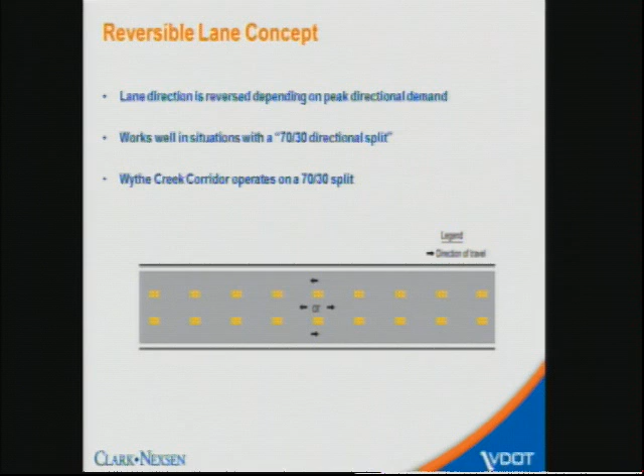It works well. So in this situation, you would dedicate 2 lanes south in the morning, 2 lanes north in the evening, and in the off-peak periods, basically 9 a.m. to 4 p.m., that center lane could operate as an opposing left turn lane as an option. So the project is set up very well for this option based on the way traffic operates along the corridor.

What we'll do first is get into the cost savings. What's occurring with this concept and how do we achieve the cost savings? First off, and we'll focus on Hampton, that's where the majority of the cost increase is and where the majority of the savings are. We have right-of-way savings due to a pending property transfer with NASA. NASA's working very close with VDOT to transfer the property out front of the fence line in order to allow the alignment to shift further to the east.

That's a big benefit. We're, of course, eliminating the raised medians between Commander Shepard and Voyager. You typically see those when you have a 4-lane divided highway. We're now taking away the division, and it's going to be a 3-lane undivided roadway. Reduced right-of-way impacts on the west side of the alignment. We've got some slides that will show you, so you'll be able to really visualize what we're talking about there.

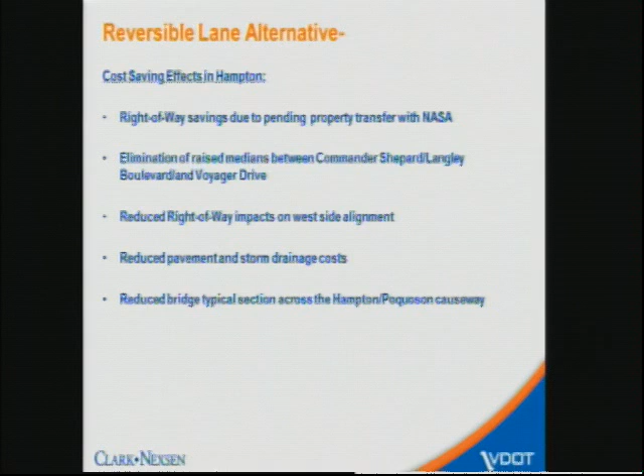And of course, when you're talking about going from 4 lanes down to 3, reduced pavement, drainage, infrastructure, there's a reduction in cost there. And then of course the bridge. The bridge is the most expensive project element, as Mark indicated. You're reducing the width of the bridge. Good savings there. Next slide.

So this is just an overview of the cost savings that we've estimated. About $2.5 million, again, this is in Hampton, $2.5 million in the pavement, earthwork. Bridge savings, 2.6. We have an additive item of $600,000. That's for signalization, and we'll get into that in a minute related to the reversible concept.

So that's a total construction savings of $4.5 million. And when you escalate that to 2018, which is when we're planning to advertise the project for construction, that's a $5 million savings. The right-of-way savings is pretty significant. Just the property, the land itself, $450,000.

The building value's been estimated at 1.5, and then all of the various administrative savings costs, such as relocation assistance, administration, condemnation hearings, those have been estimated at 1.1. So when you roll all this up, grand total savings of $8.4 million in Hampton alone.

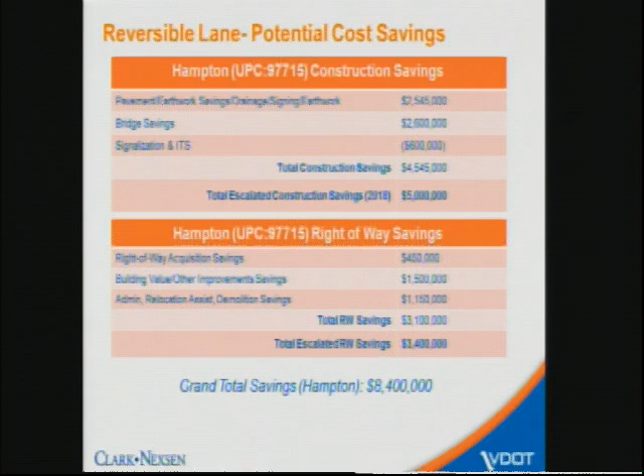Next. Okay. Talking about Poquoson, we're talking about reducing the typical section or the roadway width 5 foot on either side. Again, taking away that 4th lane. And so with the reduced pavement and drainage costs there. Also anticipating savings related to not impacting the HRSD force main to the south end of the project in Poquoson.

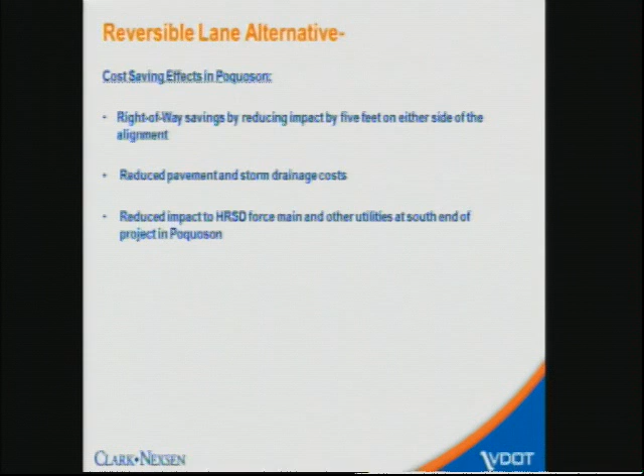Taking these savings into account, we figured about $800,000 in the pavement, earthwork, road construction savings, but then the additive cost for the ITS, Intelligent Transportation Systems components that are related to the reversible, you get a savings of about $100,000. And then with the property, as shown below, we estimated about $400,000.

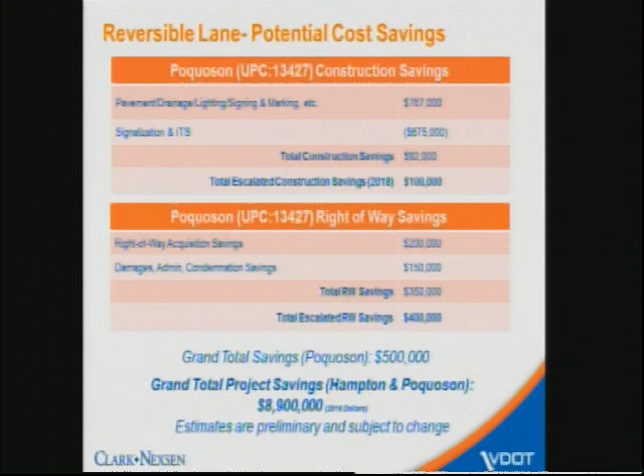So rolling all this up, go ahead and hit the button. We're now at $8.9 million, call it $9 million in savings, realizing that we had that $10.4 million shortfall that we're trying to close. So it gets us very close. Very close. Yep. Thank you. Okay.

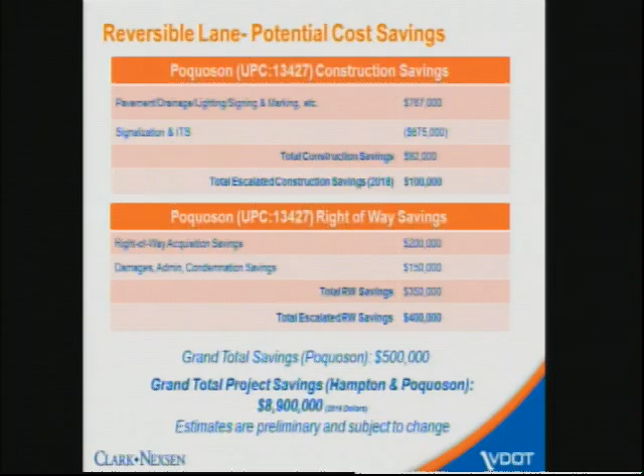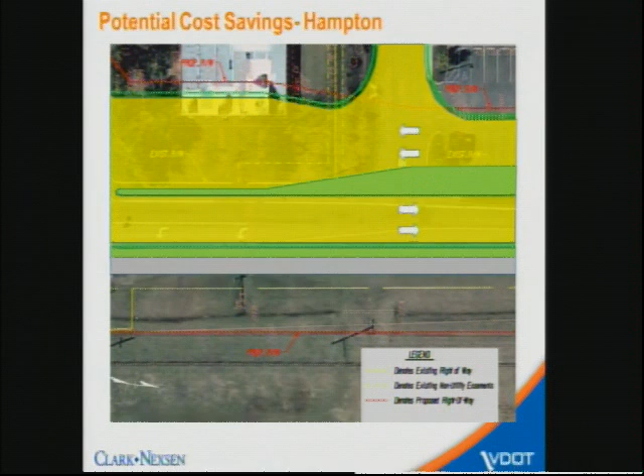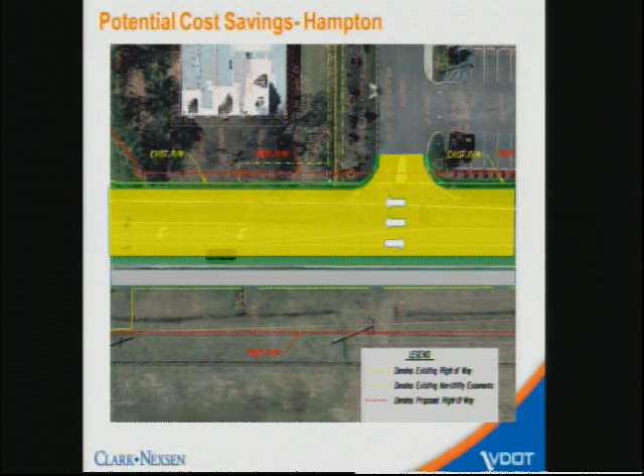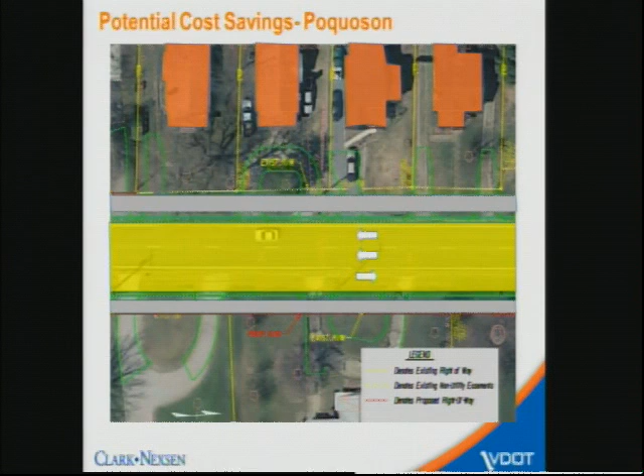If you take a look on that side of the roadway, we can build the improvements within the existing right-of-way. Now, there would likely be some easements required to allow the contractor to get in there and construct, but you can see it's a significant reduction. And again, what we're trying to achieve here is splitting the property acquisition between both sides of the roadway. You see the house on the east side, which is the bottom of the screen here. We're trying to equalize the acquisition on both sides of the roadway, so we're still achieving that.

And utilities, as far as relocation of utilities, still required? Yes, sir. We've got overhead power, telephone, cable. Those are going to have to be relocated. There's an 8-inch water line that's out there. We're anticipating full relocation of that, as well as the force main. There's an HRSD force main. All those facilities still require relocation, regardless of the 4-lane footprint or the 3.

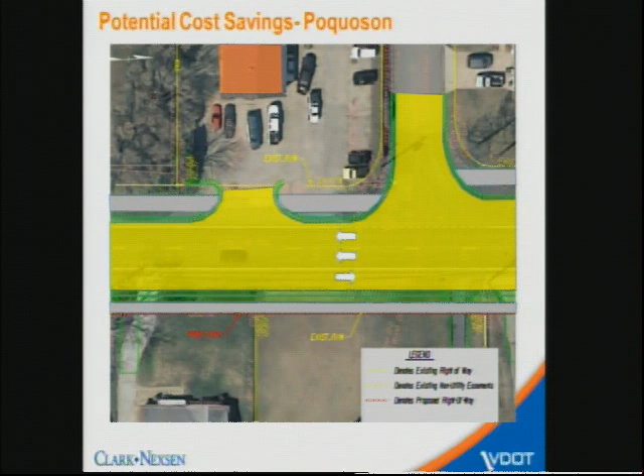This is out front of McPherson's garage. You can see a drastic decrease here. Okay. Next slide. Okay, so what I'm going to do is hand it over to Wes, and Wes is going to talk about how the three-lane roadway would operate.

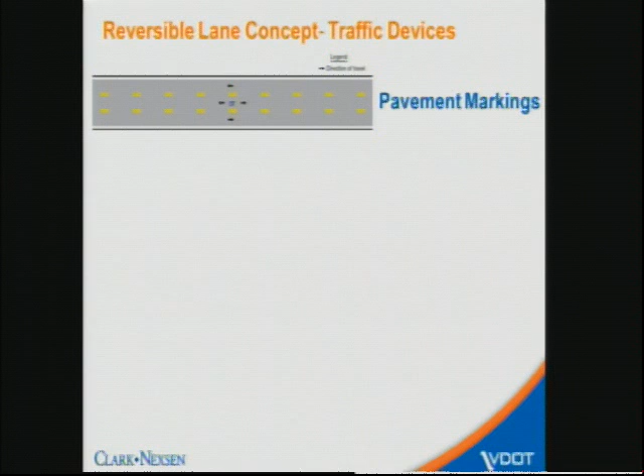Okay, so basically our general concept with reversible lanes is they are relatively unique throughout the United States. They are done, and we're going to show you some examples here through many different municipalities. But something that's key here is the way that we're proposing to implement this is according to standard federal guidelines. So that's what I'm going to show you here. We'll implement it through the use of pavement markings, lane use control signals, and also static sign panels.

So your lane use control signals, and they're actually starting to put these on the interstates locally on 264 on the south side, basically will designate which lane is open for use given the different time of day. And static panels will supplement that so that people will know, okay, traditionally that lane is open between this hour and this hour.

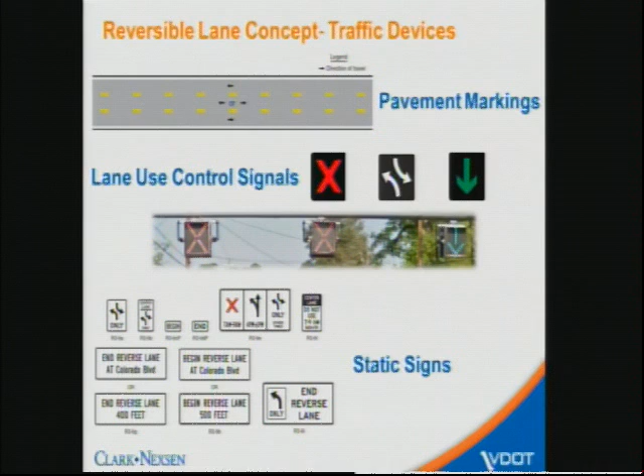The nice thing about the dynamic lane control signs is it also gives you the ability to utilize them for different types of situations such as hurricane evacuations and things of that nature, something that wouldn't be standard. Operationally, this is just picking one spot along the corridor. You would have an overhead mast arm very similar to a traffic signal pole that's going to span the roadway over top of the 3 lanes, and it would house 6 dynamic faces. So you would display the X's on the lanes that were not going to be used and the green arrows on the lanes that are going to be used.

The AM peak hour concept, between about 7 and 9 a.m., we're going to have 2 lanes going southbound and 1 lane going northbound. During the non-peak hour, pretty much between 9 a.m. and 4 p.m., at least as of right now, we're proposing to have it as a 2-way left-hand turn lane, so that residents or business people going to any of the houses or commercial properties along the corridor can turn into that middle lane and wait for a gap to make that left into the property or business. And lastly, in the PM peak hour, it will be 2 lanes going northbound with 1 lane going southbound.

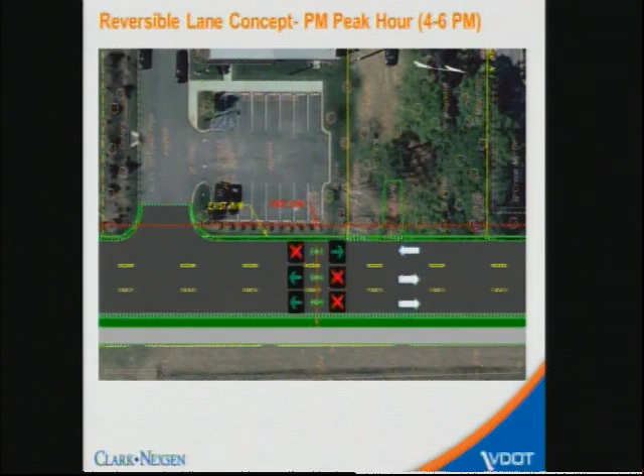As I briefly mentioned, these are done throughout the United States; these are just a few examples of the best ones that we've seen out there. Maryland has it. There are several around Washington, D.C. Macon, Georgia, which we have some pictures of in a second, is a very nice one. Houston, Texas, Charlotte, and also Newport News, Virginia does operate one outside of the shipyard.

I'm very familiar with River Road, so there you go, yeah. I travel it all the time.

And you can see here too, this isn't just done for 3-lane sections. A lot of times outside of NFL football stadiums and basketball stadiums, they'll do this to help handle that really peak directional flow in and out of the areas. The Texas lanes are actually used for that situation. When we get that pro basketball team.

This is Vineville Avenue in Macon, Georgia. The picture's a little bit blurry here, but the reason we wanted to show you these pictures is, of all of them, this is one of the most recent installations. From the data we found, and we're still trying to get in contact with their city traffic engineer, this system has been around since the late 90s, and they've actually reinstalled it again, as you can see here with these signs. But this corridor looks very similar, in a very non-technical way, to the Poquoson corridor. We have residential houses along the corridor.

What we would propose is a decorative type pole, this black pole here, possibly a fluted black pole, but those are all details to be worked out far later, just so it blends in better with the environment. So you can see here it'd be 3 lanes. Ignore the sidewalks, obviously; the sidewalks will look a lot better for this project. But we're focusing on the overhead mast arm here.

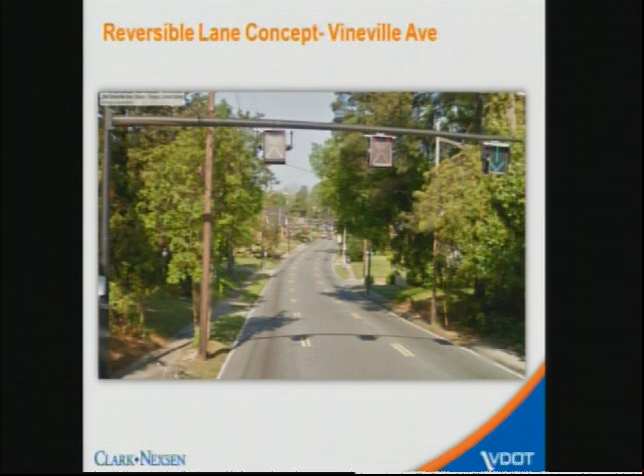As we're getting closer now, you can see a close-up. So you've got your 2 red X's. You can see for this particular period, we've got 1 lane going into the screen, and the 2 lanes behind them are coming towards us, or that center lane can be the 2-way left-hand turn lane like we talked about. Those pictures previously were the residential corridor. Here's an example of this operation, same road, Vineville Avenue, Macon, Georgia, in a very urban corridor with commercial businesses. You can see they've got dozens of commercial entrances along the corridor, and they're still operating the system.

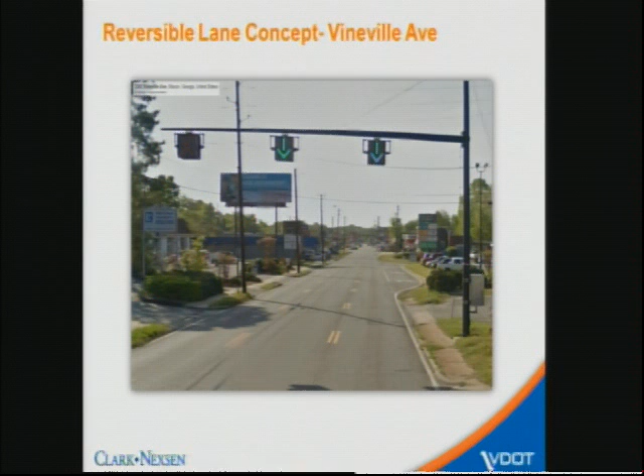The most important concept with implementing any intelligent transportation system, but particularly this, is trying to figure out what the drivers are going to be expecting and wanting. It's really hard to see here, but at every overhead mast arm, when you get directly underneath it, you'll have visual cues for the next one downstream. So there'll never be a point where you enter or exit that corridor where you can't see these lane control signals downstream. And that's just a safety situation.

A question that may be coming to mind: can this be done around signalized intersections? Yes, it can. In Hampton, we have 2 signalized intersections as proposed, and this is, again, the same corridor at a signalized intersection. We could talk about the details later if you want. But basically, that middle lane turns, you have a stop bar that goes across, and the directional use arrows are downstream here, and then they're actually directly underneath where this picture was taken from.

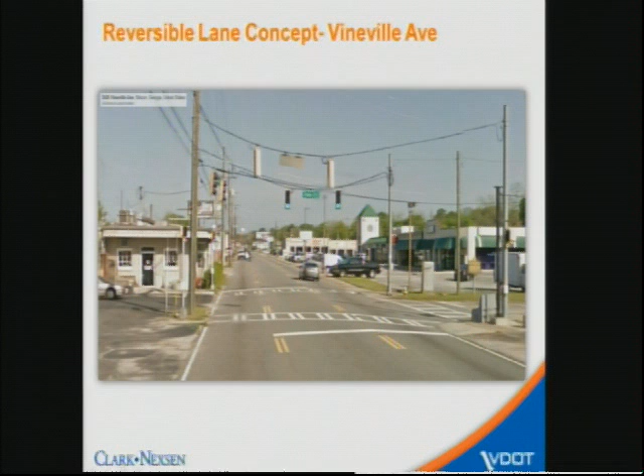This is another example for Vineville Avenue in Georgia. This is a good example. You can see here the middle, well, it's very blurry for you all, but the middle signal is a two-way left-hand turn symbol that you saw in the previous graphic. So that's just showing a three-lane section that can be done along this corridor.

Before we open it up to questions, I'd just like to offer up that you don't typically see these types of installations on new construction. What you'll typically see them in is retrofit of existing roadways. But certainly, in today's environment, this is a plausible solution for this particular application.

It's in the MUTCD, the Manual on Uniform Traffic Control Devices. It's endorsed by the Federal Highway Administration. It is certainly a good option for this alignment based on the commuter traffic that uses the roadway. We think it sets up very well for the project.

Okay, questions of council? Just a comment, Langley Air Force Base has been using the same concept for, I'm gonna guess, 20 years on their main thoroughfares into and out of the Air Force Base. Right.

What happens during a power outage? What do those signals do during a power outage? So the signal systems would be on a backup system. That's the way we would design the system. So when you have a power outage, you would have a generator backup.